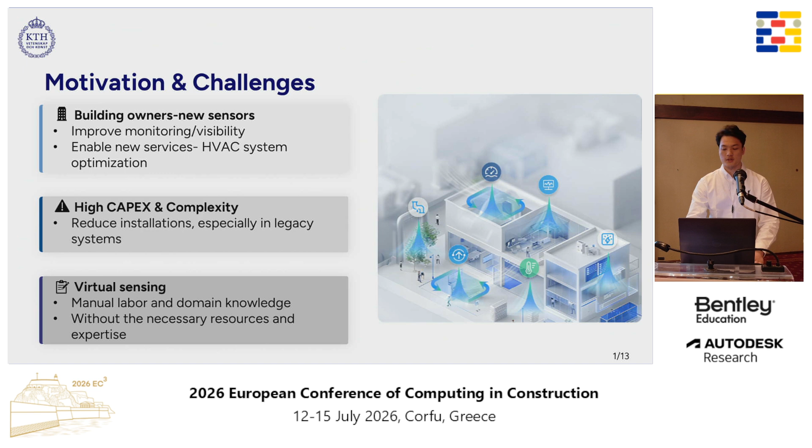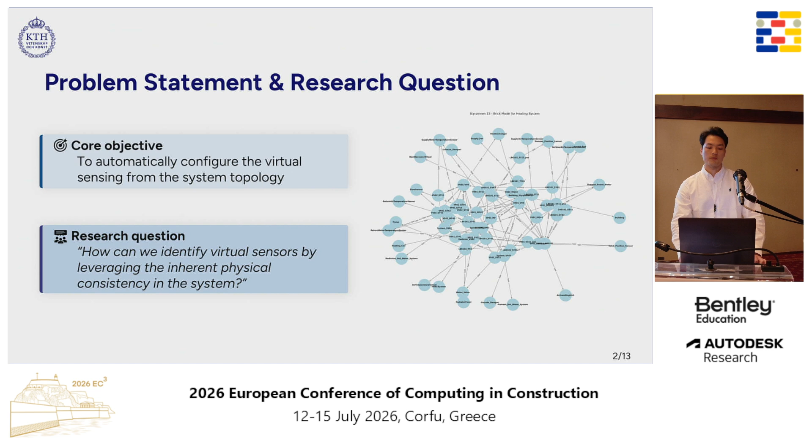We think virtual sensing can help, but it needs massive manual labor and domain knowledge. And building owners, especially small building owners, don't have the necessary resources and expertise. So how to solve that? We want to automatically configure virtual sensing from the system topology through the physical consistency between the equipment and the sensors. So how can we identify virtual sensors? By leveraging the inherent physical consistency in the system.

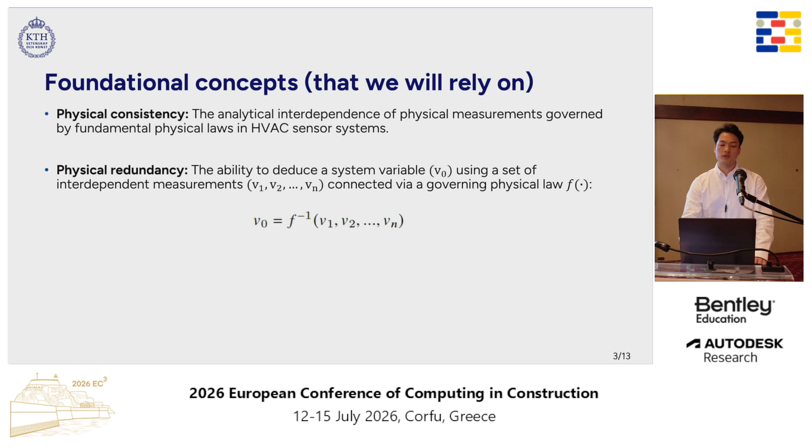Before that, I want to explain three foundational concepts. The first is physical consistency. All physical measurements are not isolated; they are governed by fundamental physical laws. The second is physical redundancy. Since we have these physical laws, if we measure sufficient variables, we can calculate the unknown variable by inverting the governing physical law. The third is observability. It is the structural capacity to calculate the value of a state variable.

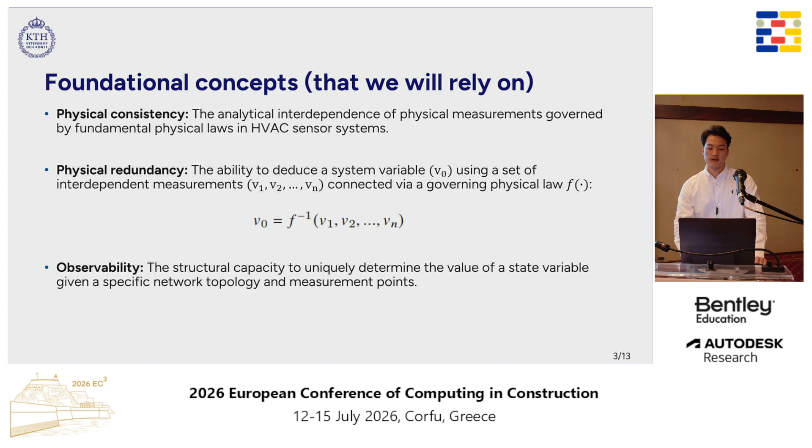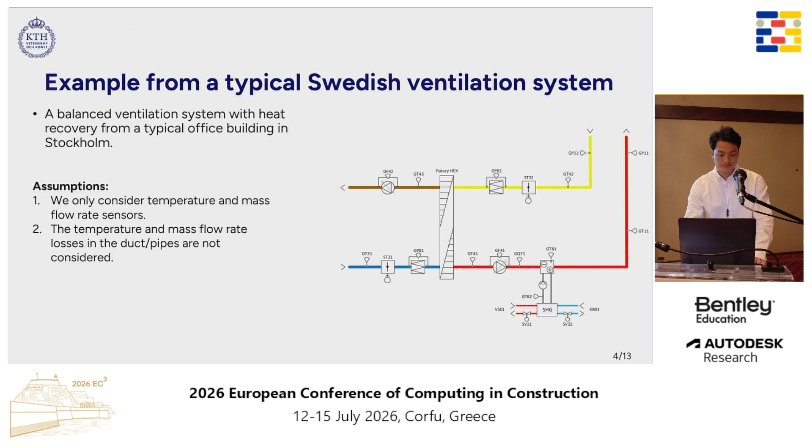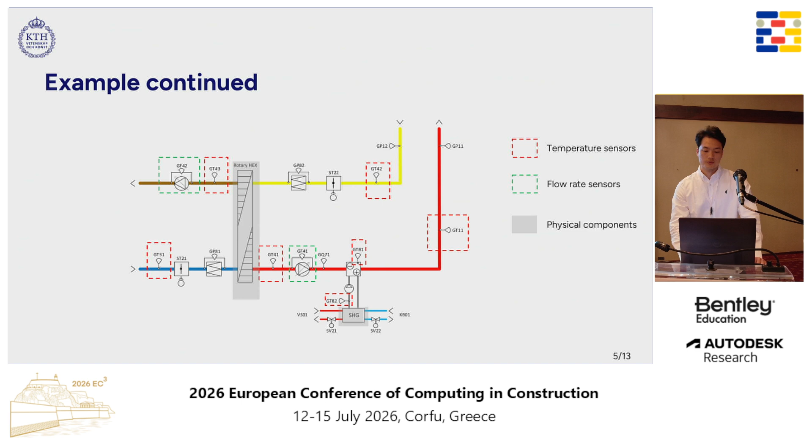Here is an example we used in our paper to demonstrate how our framework works in real life. It is a balanced ventilation system with heat recovery from a typical office building in Stockholm. We have some assumptions: we only consider temperature and mass flow rate sensors, and we didn't consider the losses. Now let me briefly describe this system. We have 7 temperature sensors and 2 flow rate sensors, and 2 physical components, the heat recovery and the heating battery. What we want to know is the mass flow rate here. So then, how to know that?

Let's move to the methodology. It's about graph construction. This system can be mapped into this bipartite graph. It contains 10 variables, 2 components, and the relationships between them. Each component has its own governing equation. For the heat recovery, all the variables are known, so there exists analytical redundancy for fault detection. For the heating battery, only M3 is unknown, so there exists physical redundancy for solvable components. We can use the governing equation to calculate it.

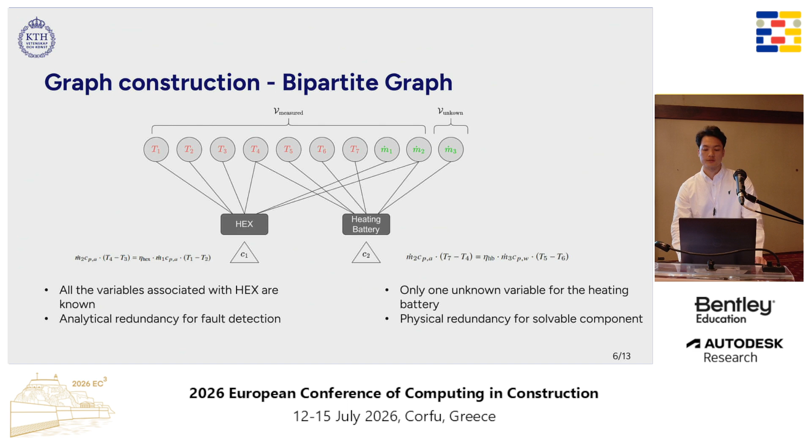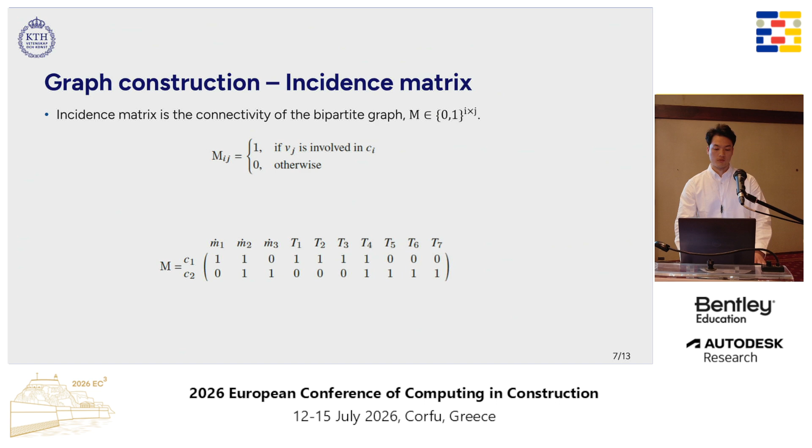To make it readable for the computer, we construct an incidence matrix. If the variable is involved in the component, then the value is 1. Otherwise, it is 0. So this graph forms this incidence matrix, and only M3 is unknown. The global variable set is the union of two mutually exclusive subsets, the measured and unknown subsets.

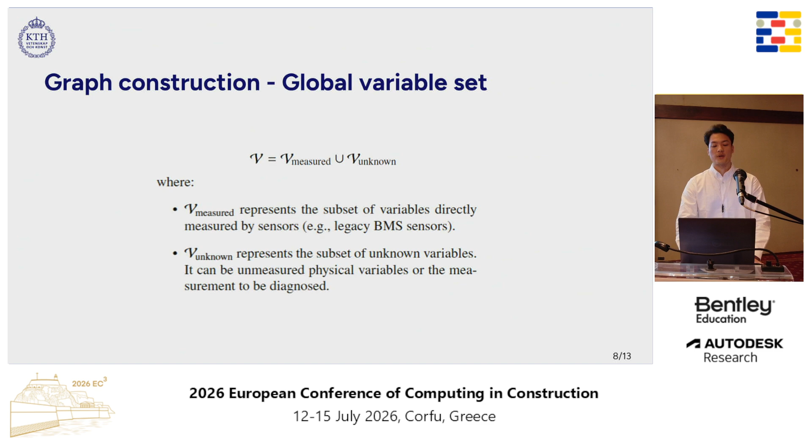Then is the unknown degree. We calculate it for each component at iteration k by this formula. If the unknown degree equals 1, the graph is in solvable condition. Only one unknown variable exists, and we can use the governing equation to calculate it. If the unknown degree equals 0, it is in redundant condition. All the variables are known, so we can use it for fault detection. If the unknown degree is greater than 1, it is in unsolvable condition. It contains multiple unknowns, so it remains unsolvable in this iteration.

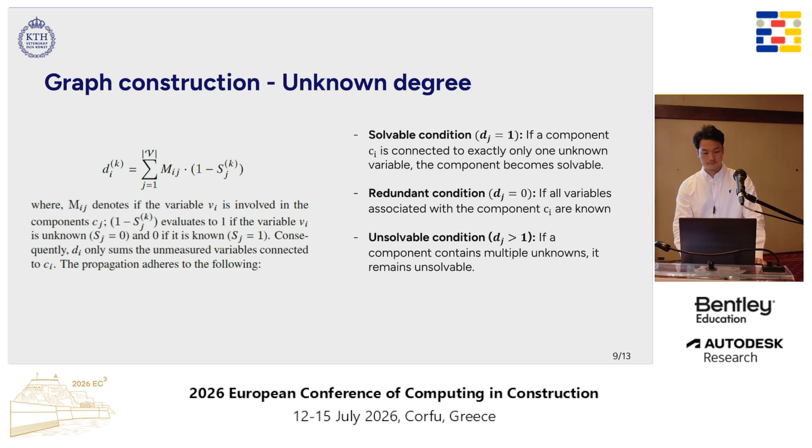So to answer that question, we conduct this observability propagation analysis. The system is mapped into the bipartite graph, and then it forms this incidence matrix. Only M3 is unknown. For the heat recovery, all the variables are known, so the unknown degree is 0. It is in redundant condition. For the heating battery, only M3 is unknown, so the unknown degree is 1. So it is in solvable condition, and we can use the governing equation to calculate M3.

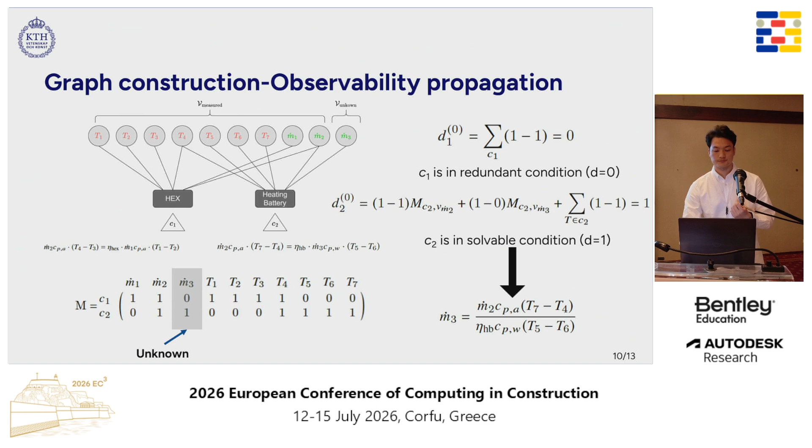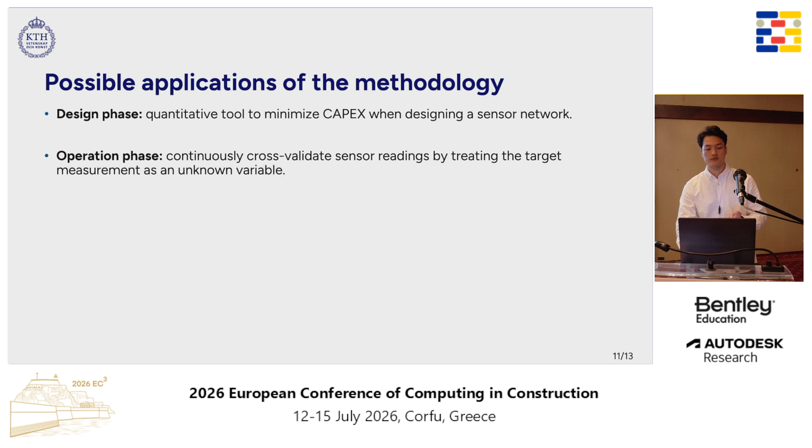So what about the possible applications? In the design phase, it can minimize CAPEX by optimizing sensor placements. Using it, we can know which one is redundant and which one is necessary. In the operation phase, it can conduct robust fault detection by cross-validation. In the retrofitting phase, it can provide virtual sensors to avoid new installation and new wiring work.

Of course, we need to acknowledge some limitations of our current stage. We didn't consider uncertainties beyond theoretical physical laws. We need to identify sensors needed for safety reasons, such as freeze protection. And the energy loss is simplified as a constant value. In the future, we want to automate the modeling process with existing semantic models. We also want to automate the components and physical laws identification process.

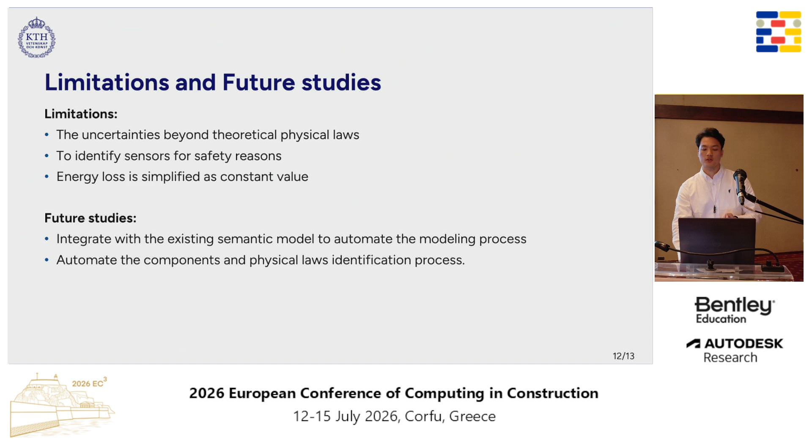So in conclusion, to answer the research question, this framework has physical consistency modeling. It abstracts the system into a bipartite graph and uses the incidence matrix to make it machine readable. Then it has virtual sensor identification: we conduct an observability propagation analysis using the unknown degree to identify sensor redundancy. For lifecycle engineering value, it can achieve sensor network optimization and robust fault detection in the design, operation, and retrofitting phases.